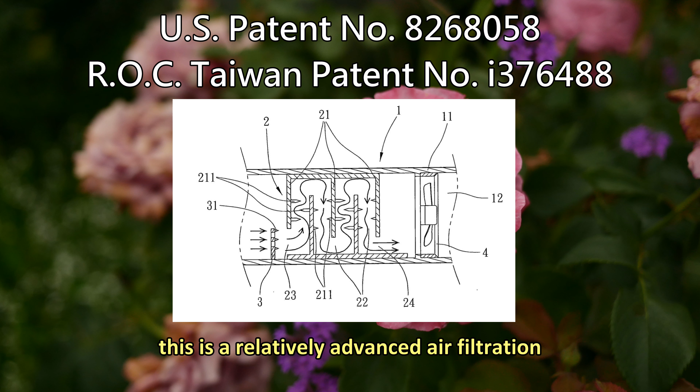The other is to use the physical phenomenon of positive and negative electric attraction to adsorb suspended particles in the air to charged metal plates, metal strips, or metal mesh, thereby obtaining the air filtration effect. Theoretically, this is a relatively advanced air filtration technology method, but due to the problem of poor technical application design, the effect is not good and it is not commonly used.

I have lived in Los Angeles, California, USA for many years. This wonderful place, California, is like a paradise. Big trees and grasses bloom and bear fruit all year round, releasing large amounts of pollen. These lovely pollens caused severe allergy attacks in me, and I lived with miserable and painful allergies and colds all year round.

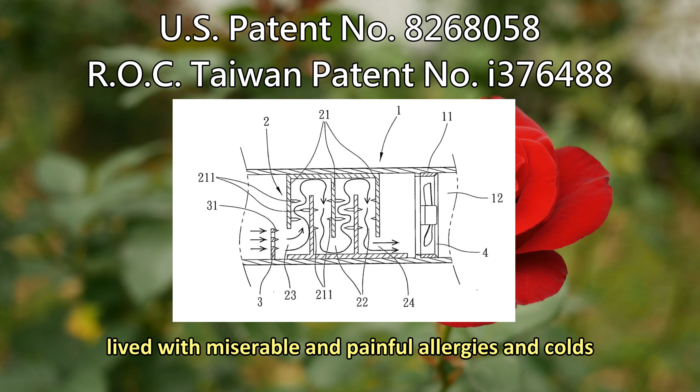Allergies occur when the concentration of certain toxins accumulates in the body to a certain level, and cannot be restored by traditional medical methods such as pills or injections.

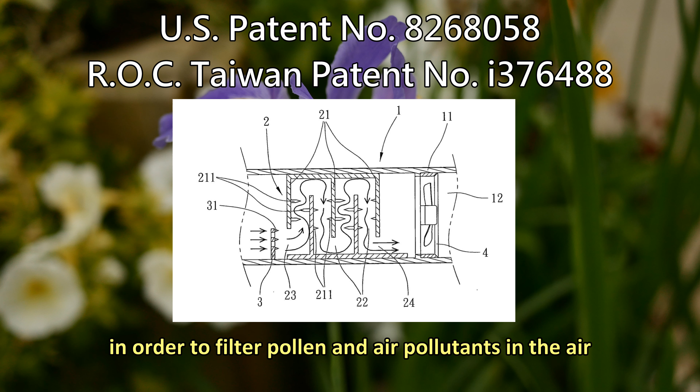In order to filter pollen and air pollutants in the air and improve my living and physical conditions, I bought a variety of air filters to use. The improvement effect was still not ideal, so I collected various air filters from all over the world, and researched and experimented with all the information I needed about air purification.

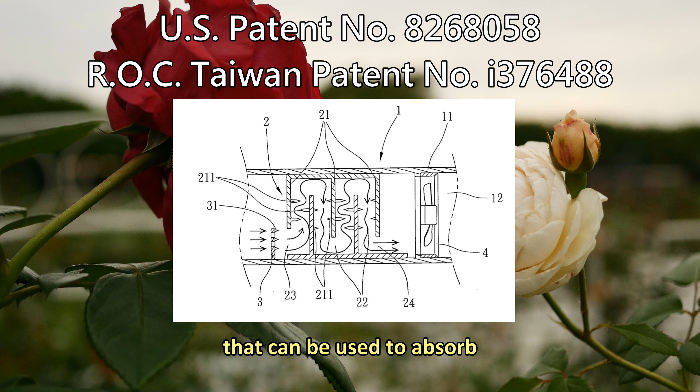Necessity is the mother of invention. After more than 10 years of continuous hard work, my highly intelligent son and I finally had the idea to invent an unprecedented new air filtration device that can be used to absorb various sizes and properties of pollutant suspended particles in the air. After applying for patents in various countries, because it is an unprecedented, innovative, unique, and practical physical principle application technology, it was quickly approved and authorized by the invention patent rights of various countries.

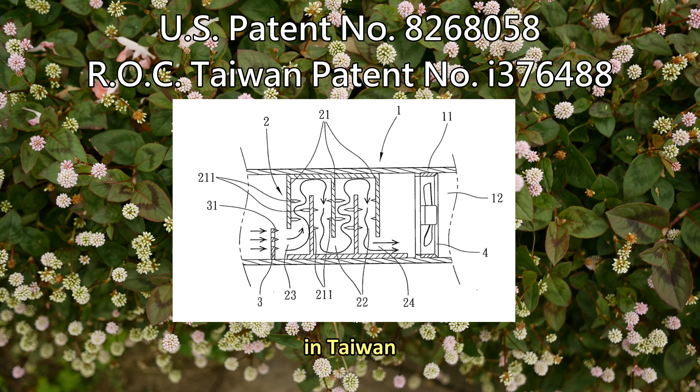In Taiwan, the invention patent number valid for 20 years is I376488 — I376488, not 1376488. The full name is High Efficiency Labyrinth Air Treatment Device.

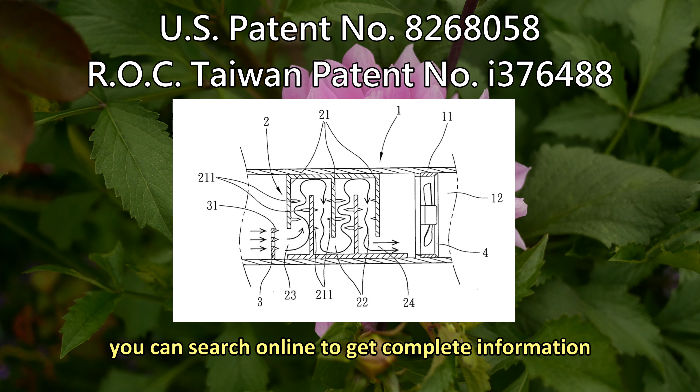For detailed invention patent application information and content, you can search online to get complete information. The contents of invention application documents are generally relatively obscure and difficult to understand. I explain them in spoken language to help you better understand the principles and effects of this physical invention patent. This labyrinth air treatment device is installed in the middle of the air filter.

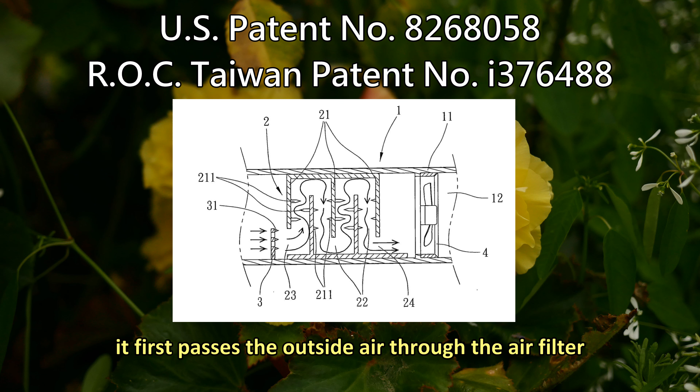It first passes the outside air through the air filter, filtering the large suspended particles in the air before entering the closed space. In this closed space, the initially filtered air is immediately ionized by the negative ions of the negative ion generator and becomes negatively charged.

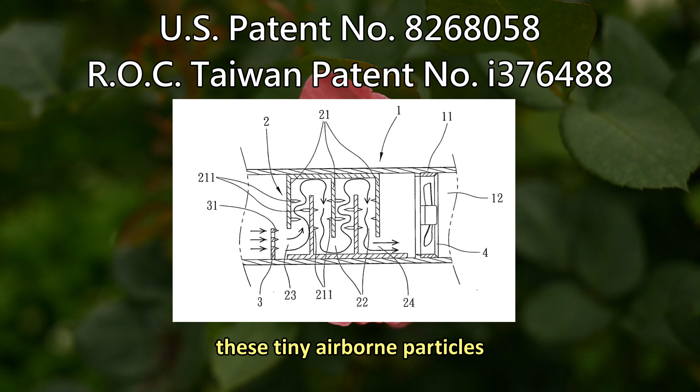These tiny airborne particles, even some suspended particles that exist in the form of molecules, will be ionized regardless of their size and become negatively charged. They are quickly attracted into a semi-enclosed one-way tube wall, all of which will be positively charged, in the air purification device with the electric labyrinth channel structure.

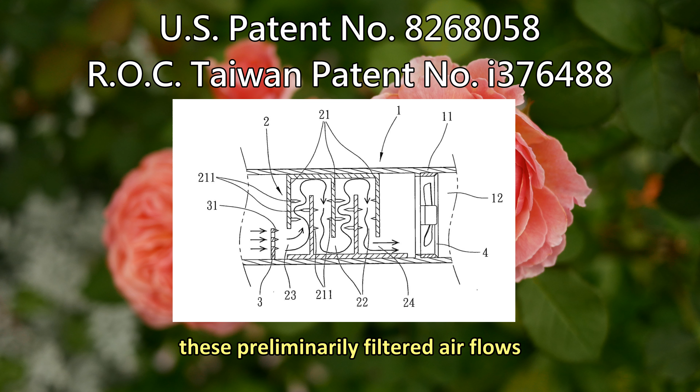These preliminarily filtered air flows carry negatively charged suspended particles forward in circles in the rotating air flow path. The strip-shaped airflow spirals forward, but the extremely tiny negatively charged suspended particles in the airflow can only move in a straight line, like a bullet at extremely fast speed, directly hitting the positively charged maze.

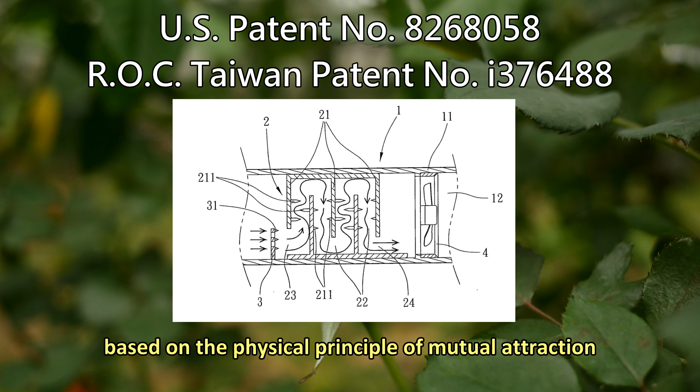At every corner, based on the physical principle of mutual attraction between positive and negative electricity, and the huge difference in physical volume and weight between the two, all suspended particles, even the smallest ones, are adsorbed on the surface of the positive tube wall. The air purified in this way does not contain any impurities or suspended particles except gas.

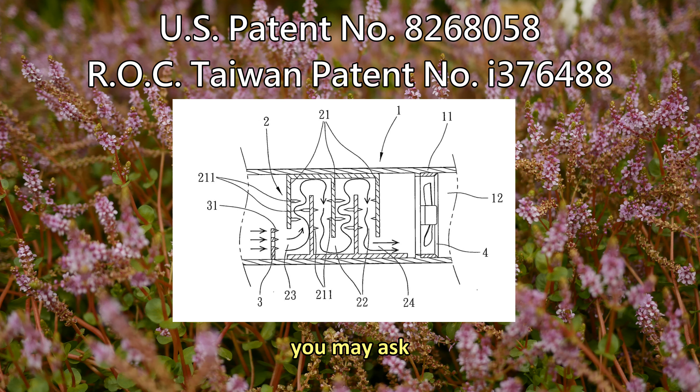You may ask, can such a positive and negative electric purifier completely absorb 100% of all suspended particles in the air? First of all, you must understand that the attraction of positive and negative electricity is a true physical phenomenon on our Earth. If the negative charge of the suspended particles in the air is insufficient, you can increase the number and efficiency of the negative ion generator.

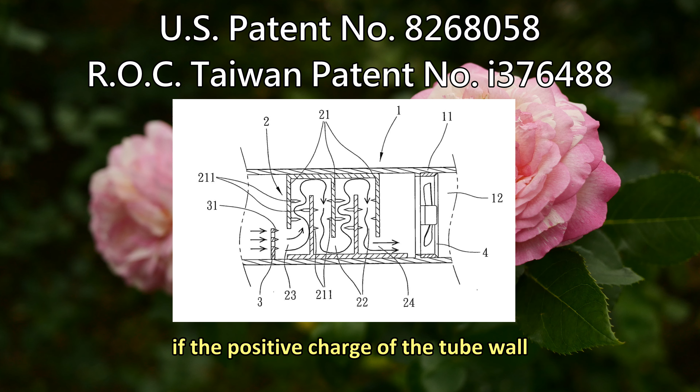If the positive charge of the tube wall is not strong enough to absorb all the negatively charged suspended particles in the airflow, then increase the voltage to increase its charge, and it is easy to achieve the goal of completely absorbing all the suspended particles in the air.

This phenomenon of positive and negative electricity attracting each other can be explained by the fact that powerful magnets can absorb tiny iron sand. The smaller the iron sand, the more firmly it will be attracted by the magnet, and it will be difficult to break away. The suspended particles in the positively charged labyrinth device are also completely absorbed by the tube wall and unable to escape due to the same principle, which is as strong as an electroplating effect.

But basically all suspended particles within its range of action will be ionized by negative ions and become negatively charged. These tiny, invisible, negatively charged suspended particles follow the airflow and will be adsorbed to the walls and floors when they hit them. If they happen to hit a positively charged metal surface, they will be attracted to it and adsorbed on its surface, unable to come off.

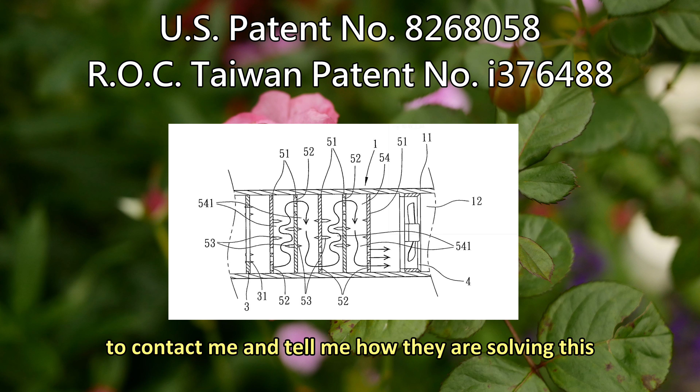As the world's top designer in the air purification industry, it is difficult for me to imagine what better or equally good method could completely avoid the chip yield limitation problem caused by suspended particles, if not this patented technology. I would very much like TSMC to contact me and tell me how they are solving this problem. If TSMC is currently using my invented patented structural technology in its factories, I hope TSMC can immediately stop using it and contact me to negotiate a licensing agreement and a profit-sharing contract.

I only sent an email to TSMC about this invention patent 5 or 6 years ago. Intel and Samsung are both too big to be contacted, so I have never contacted them. Therefore, it is inevitable that Intel and Samsung do not understand this patented air purification technology. This also coincidentally explains why TSMC has been making progress without any hindrance in the past 4 or 5 years in shrinking its chip manufacturing process, while Intel and Samsung have suffered setbacks one after another.

If TSMC really uses my key patented technology to gain huge benefits in their chip manufacturing process, as an invention patent owner, I have the right to claim not only compensation, but also sharing of past and future profits from the application of this patented technology. If you have relevant information or evidence, please feel free to contact me. In addition to upholding justice for the world, the amount involved in this case may be extremely huge, and I am happy to share my interests with those who can help me.